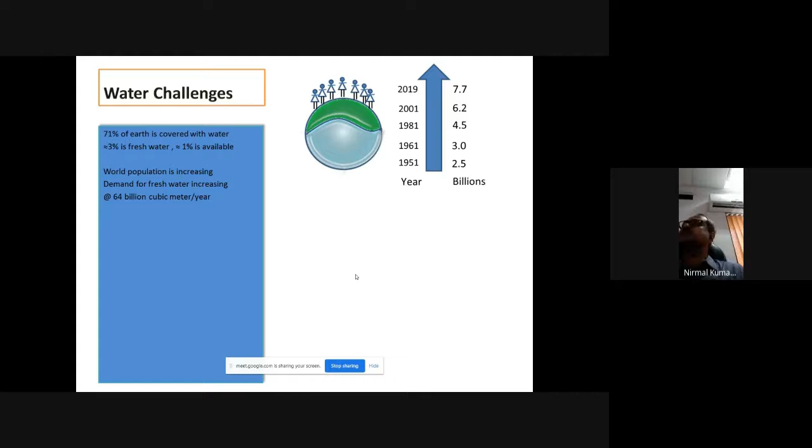And the way the population is increasing, you can see the statistics, 2.5 billion to 7.7 billion in 2019. So there is an increasing need for fresh water. There is 64 billion cubic meters per year; this is what the data was saying a few years back. So most of the countries are becoming water stressed, also India. We say a country is water stressed when they extract more than 80% of their groundwater.

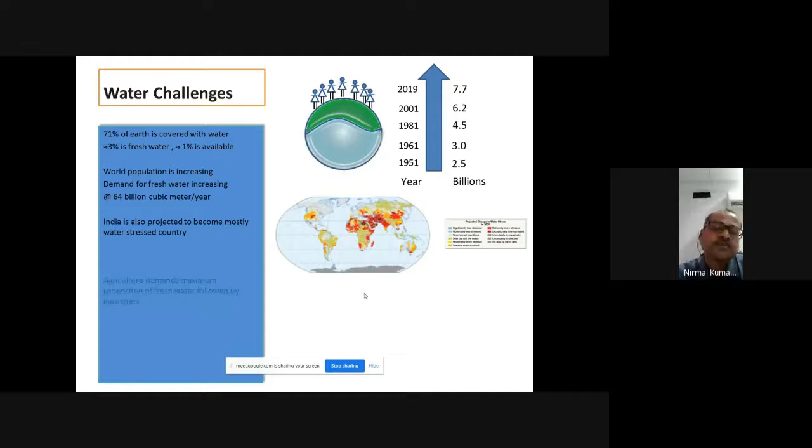So what is water consumption? When we are extracting water and utilizing it, and that water cannot be utilized further for any other purpose, then only that part is consumed. The rest of the part is in a way wastage. Either it is drained or it is producing wastewater.

So when the world is becoming increasingly water stressed, we really cannot afford to lose this water, particularly fresh water. Reclaim and reuse, all these things are fine. But the demand, you see, is 64 billion cubic meters per year, every year. So even after doing all these things, we probably will not be able to meet the water requirement of the world.

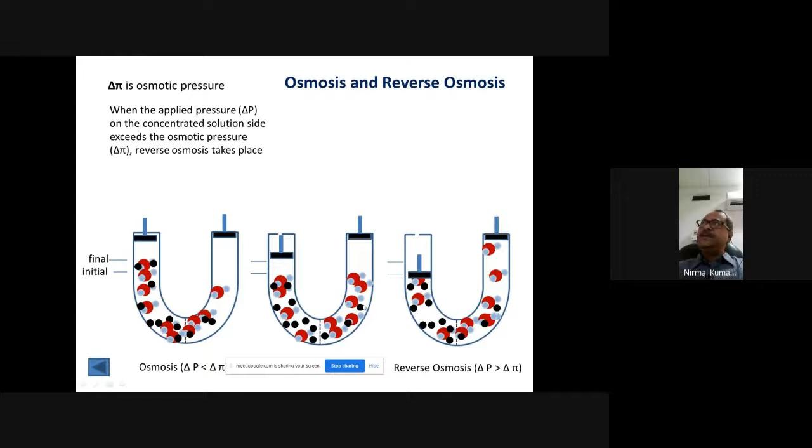So this thing was first demonstrated using a bladder, natural pig bladder probably. And thereafter, of course, everybody almost forgot this osmotic process. But a desalination unit was made available only in 1885 as a unit.

And the credit goes to, I think, a French person, but he was in Britain. One patent was granted in the same year, 1885. That was a vertical tube-like structure, and desalination was possible through that structure, I think 7,000 gallons per day. That was totally based on the thermal distillation process.

Before that, in ships, people used to boil water, collect the vapor, condense it and drink it. So in that way, desalination was done. But this was the first time in a very organized way, I will say. And during that period, of course, the steam engine came after the industrial revolution. So in ships, thermal desalination became popular.

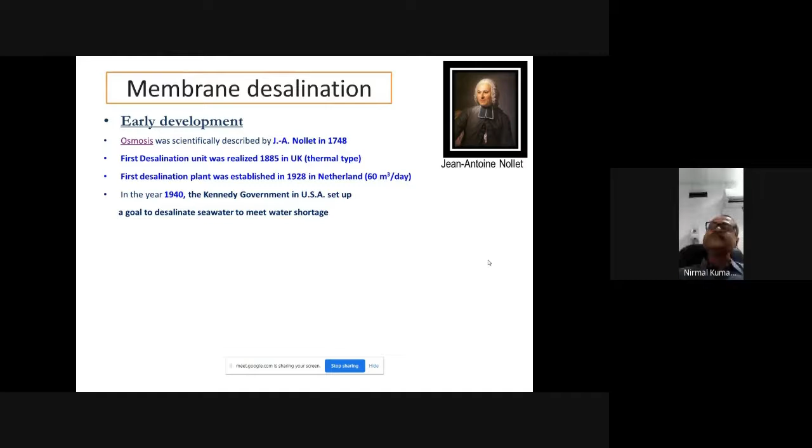One membrane, a polymeric membrane, which could desalinate water. So that was the first reverse osmosis membrane, and a process developed on the basis of the osmosis phenomenon. And just one important point I'd like to share. I couldn't find any information about this gentleman, Srinivasa Sourirajan.

He is still living. Sidney Loeb, of course, left in the year 2008. And Srinivasa Sourirajan must be about 98 now. He is in Canada. But we really don't have any information on the internet. The only thing is we can find his papers and a few patents. Everything is from the work of Loeb, or if we find something written about Loeb, then only we get something about Srinivasa Sourirajan. Otherwise, we really don't know anything. So if anybody can find any information and share it with me, I'll be very happy.

So that membrane was based on cellulose acetate polymer. They prepared a membrane which could desalinate. Now, that was a very interesting thing, and that attracted many other industries also. Though thermal desalination was there, people suddenly realized its importance because the energy requirement was much less compared to thermal desalination.

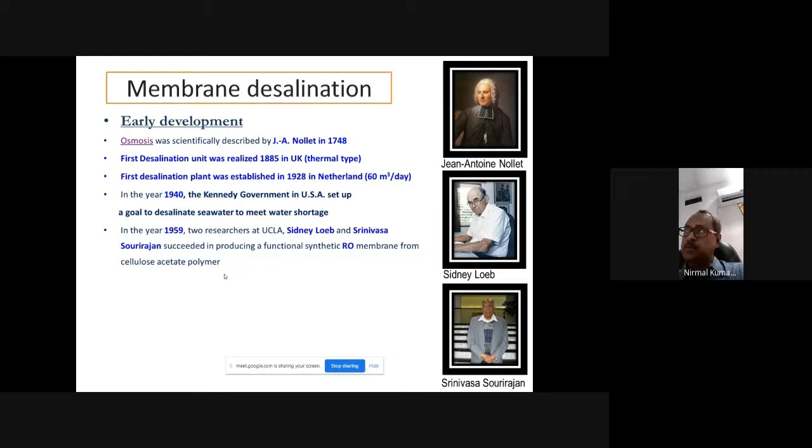And immediately in California, in the year 1965, they established a pilot plant. Only in 1959 this was discovered, and in 1965 the pilot plant was installed in California, producing 7,605,000 gallons. In 3 years it produced this much water, and salt rejection was, of course, not that good. Usually, seawater salt is around 33 to 42,000 ppm. So only 89% was the salt rejection, but still, that is very good.

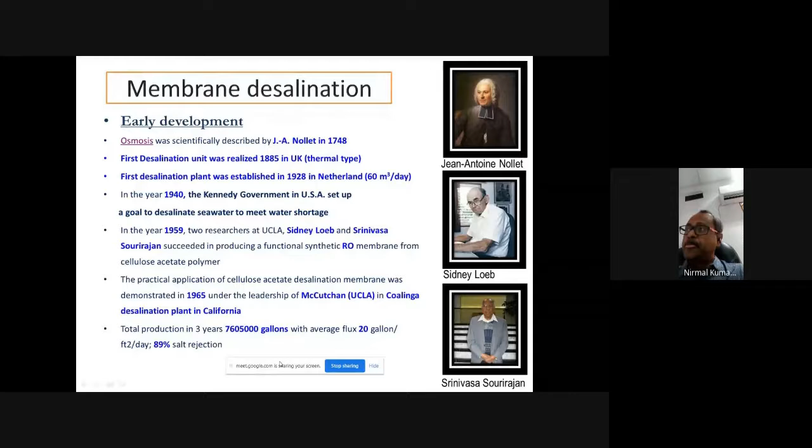So immediately, the government also showed their interest. A particular research institute was given this task, North Star Research and Development Institute in Minneapolis. And this gentleman, Peter S. Francis, I have shown. I could only find one photograph of this gentleman.

He was actually a chemist in a powder company, and his research interest was tablets, pharmaceutical tablets, coating of the tablets, all these things. So he was given the chance in this institute to further develop the membrane. And I have particularly chosen this photograph because he gave a very important concept, the composite membrane concept. What are composite membranes? In very short, I would like to say.

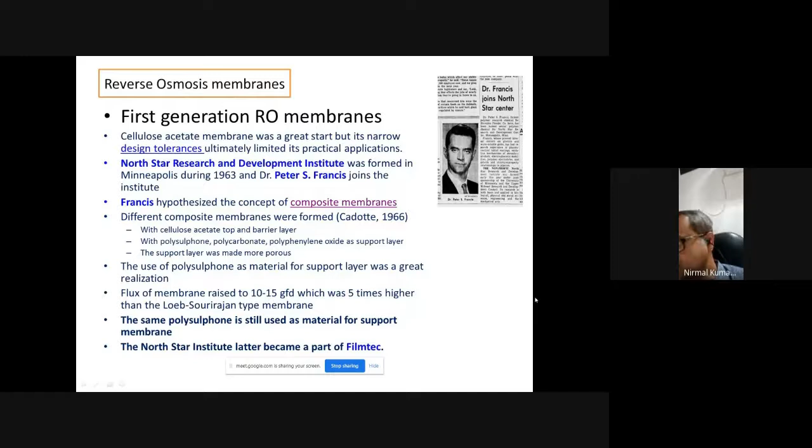So flux also improved a lot. The Sourirajan membrane was giving 3 GFD, and now it is giving 5 times that. And certainly the rejection also improved. We probably know about the FilmTec company, which is still dominating the membrane market today, FilmTec and DuPont, part of Dow. The North Star Institute, which developed this composite membrane, became part of FilmTec. So this is the contribution of Cadotte.

In a simple way, this gentleman, Morgan, conceptualized interfacial polymerization. Interfacial polymerization is nothing but taking two immiscible solvents. One monomer is taken in an organic solvent, the other in an aqueous solvent. Since they are immiscible, they meet at the interface, which is very fine, very thin. We choose monomers that are highly reactive to each other, but they cannot react directly because one is in organic media and the other in aqueous media, so only at the interface do they come in contact.

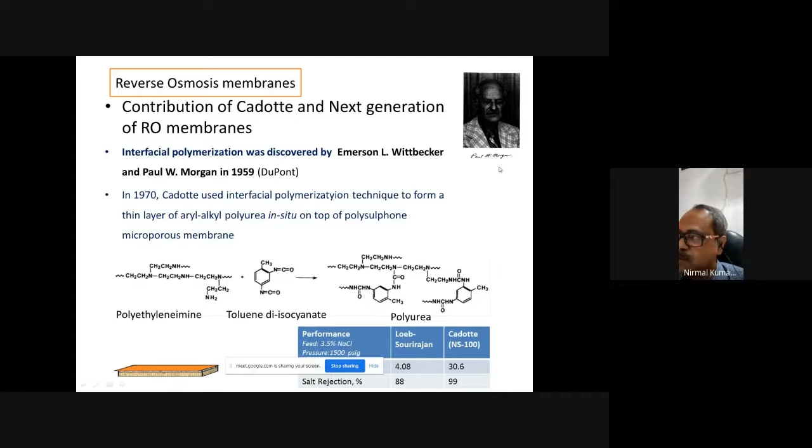So a fine film is formed, and that film is put on the support film, as I'm showing here. This is how we make the polysulfone membrane: one support, a fabric, on top of that the polysulfone membrane, and then this thin film made separately is placed on top. This is the composite membrane, and today also we are using the same kind of membrane and same chemistry. The phenomenon was discovered by Morgan, and Cadotte used it.

These are different commercialized membranes, PA300, RC100, developed during 1970 up to 1980. This piperazine based membrane, this is one monomer, and this is meta-phenylenediamine. These are still used and probably the only commercially very successful combination. All reverse osmosis membranes are a combination of meta-phenylenediamine and trimesoyl chloride forming the top layer. For nanofiltration membranes, people choose piperazine, not meta-phenylenediamine. Everything was discovered before 1980.

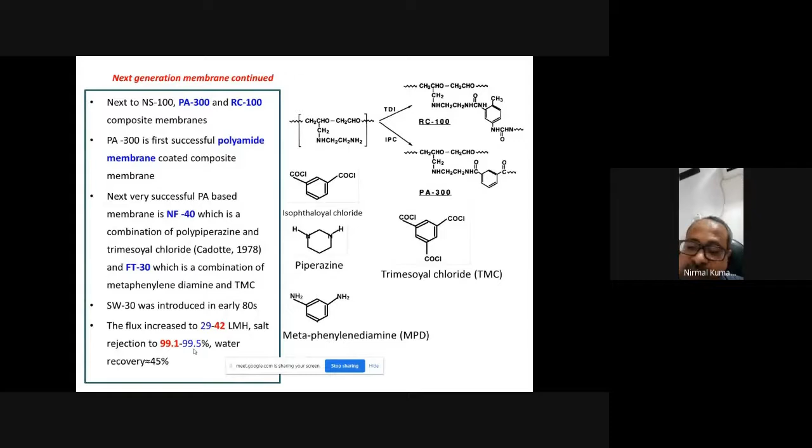So the flux also increased, 29 to 42 liters per meter square per hour, and salt rejection 99.1 to 99.5, now 99.7. In 1959 the reverse osmosis membrane was first made, and by 1978 or 80 almost all the work was done. There have been some modifications, but the base work remains the same. Rejection already reached 99.7%, so hardly any is left, and 100% rejection is not possible.

So this is the scenario of seawater desalination worldwide. Nowadays there are 19,000 plus desalination plants.

I didn't say these are all membrane based. They are desalination plants, so seawater is desalinated. This is the capacity of different, very big desalination plants. Most of them are in the Middle East. You can see these are almost all of them. And you see the capacity, 1,000 million liters per day.

It is a combination of RO and MSF. MSF is a thermal based technology, that is multi-stage flash distillation. And these, you will see, are also thermal based and RO. Actually, what happened? Saudi Arabia, United Arab Emirates, they were always water stressed countries. They didn't have a very good source of fresh water, so they were depending mostly on thermal, because at that time the reverse osmosis membrane hadn't come.

So before that, they started desalination that was thermal based. In addition to that, they have plenty of oil, fossil fuel, so they could bear the cost of energy. So most of the plants started with thermal desalination, but with time they have expanded those plants, and all the new installations, all the expansion work, are done based on the RO method. Now it is increasingly becoming favorable.

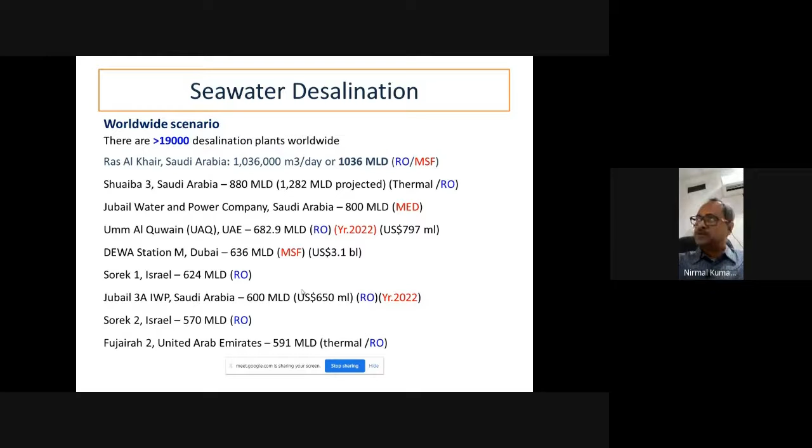So now 69% plants are actually RO plants, 18% are multi-stage flash distillation, and 7% of the plants in the world are multi-effect distillation. Multi-effect distillation is another thermal technology. The rest of the plants are like nanofiltration, electrodialysis. Those are some other desalination methods.

This table shows the distribution of these plants; these are mostly in the Middle East, East Asia and Pacific, North America. 47.5% of the desalination capacity, million cubic meters per day of water, is produced in the Middle East and North Africa. East Asia and Pacific, all these are less. You will see that these countries are very high income group countries. So desalination of water obviously will involve some cost.

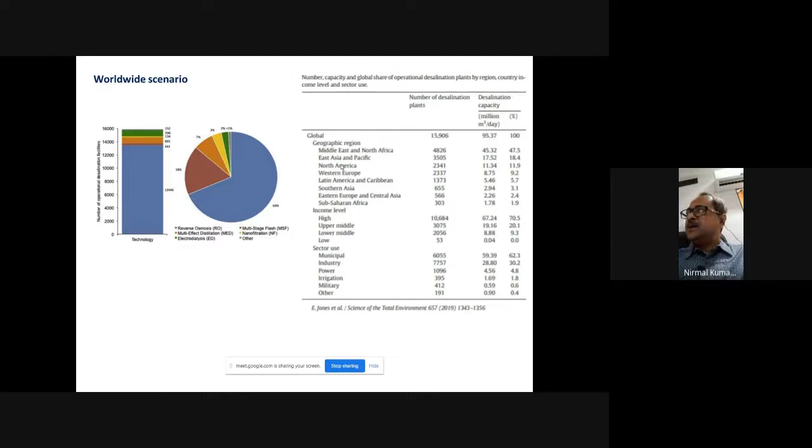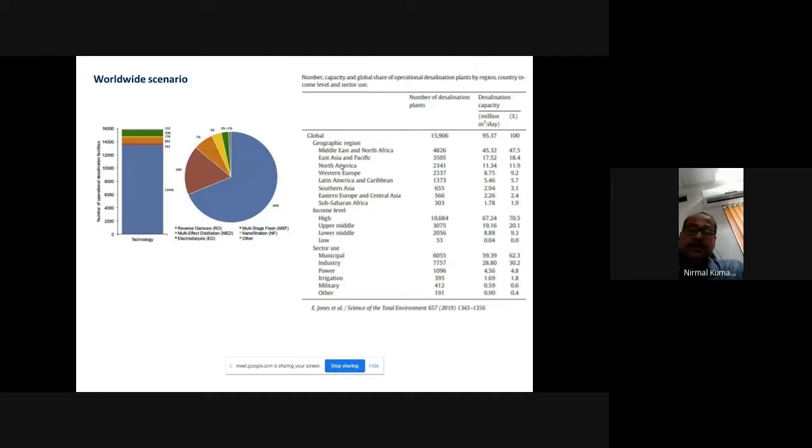And when cost is involved, the low income groups, even if they have some scarcity of water or are water stressed, they don't have fresh water, but still probably they cannot bear the cost of desalination. Nowadays the price is decreasing, but still it is not free water. So this is the worldwide situation. If you see the Gulf, they account for 61.4% of seawater desalination capacity. But for brackish water, it is North America, 36%.

And in India, there are only two plants supplying water to the Chennai municipality, but there are three other very big plants, and one of them is really big. Those are for private parties. So India accounts for only 2.2% of seawater desalination capacity, 4.4% for brackish water, and 2.3% for wastewater treatment.

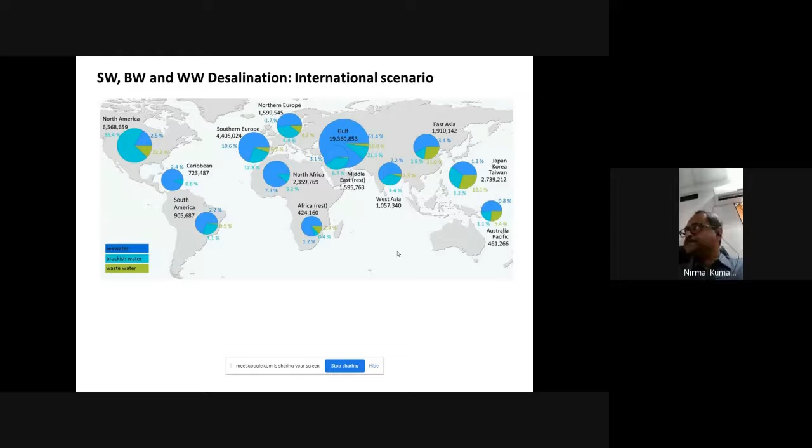So now the question comes, the cost. What contributes to the cost of desalination? Everything we have converted in terms of electrical energy. Now I need to explain a little about the MSF and MED processes. In multi-effect distillation they use steam, and the seawater is sprayed on the steam tunnel. The water becomes hot and a part gets vaporized, and that vapor is collected.

Now that vapor is again passed through a tube in cold water, and again it vaporizes the water. So in different steps, it vaporizes water, vapor gets condensed, and we collect. That is multi-effect distillation. Since steam is involved, it automatically involves thermal energy. Similarly in multi-stage flash distillation, they heat the brine, and then the brine enters different chambers with decreasing pressure.

So at atmospheric pressure water boils at 100 degrees centigrade, but when the pressure is less, water will automatically boil at a lower temperature. So in that way they increasingly decrease the temperature, and when the water enters a chamber where the pressure is maintained lower, whatever temperature the brine is carrying remains above the boiling point. So automatically, to attain equilibrium, it flashes out the vapors. That vapor they collect in different stages. So ultimately it involves thermal energy.

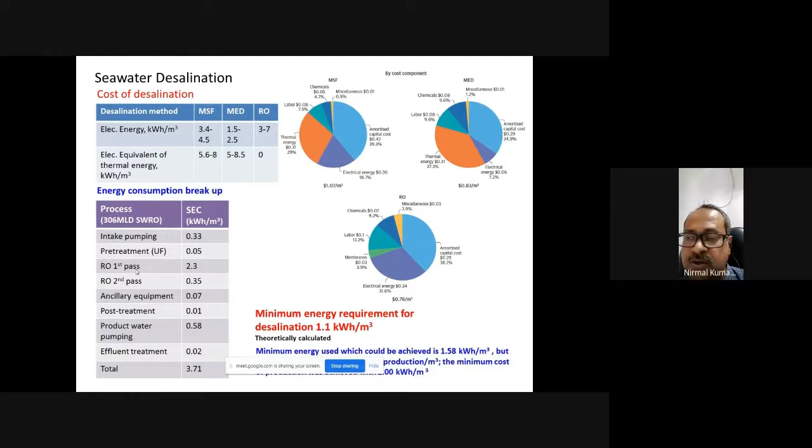Now, what are the cost components? In the RO system, the first pass consumes maximum energy. The first pass means the raw seawater, after all pre-treatment, is first filtered through a membrane, and maximum energy is required there. In subsequent passes, if required, the water may be refiltered, but there the initial feed concentration is maybe around 1,000 or 2,000 depending on plant design. So initially 42,000 to 2,000, and later from 2,000 to below 500, maybe 300 or 200, and in some countries they add minerals to it. Those steps are not really energy intensive. Only the first RO filtration step is energy intensive.

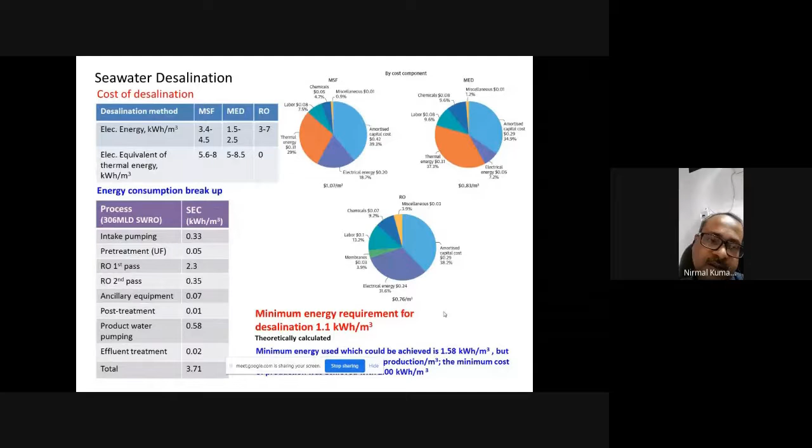Now, what is the minimum energy required to desalinate seawater using an RO membrane? It depends on the osmotic pressure. We have to apply pressure above the osmotic pressure, then only desalination will take place. Thermodynamically, it has been calculated that for seawater desalination we need 1.1 kilowatt hour per cubic meter. But in the real system the minimum recorded is 2 kilowatt hour per cubic meter. The energy required to achieve desalination in the real case is 1.5, but at plant level it is 2.

Still, I'm showing in this table that 3 to 7 kilowatt hour per cubic meter of energy is required for desalination, because other systems like intake pumps, pre-treatment, auxiliary equipment, post-treatment, and product water pumping consume 0.58 kilowatt hour of energy per cubic meter. Those are adding cost.

So if we want to reduce the cost of desalination, certainly we'll have to go for better membrane materials. But that will hardly reduce it, suppose from 2.3 down to around 2, or maybe 1.8 at maximum. That's why other things like pre-treatment, intake, pump efficiency, post-treatment, and water distribution are becoming increasingly important. People are working on those areas, other than membrane material, to reduce the cost of the desalination process.

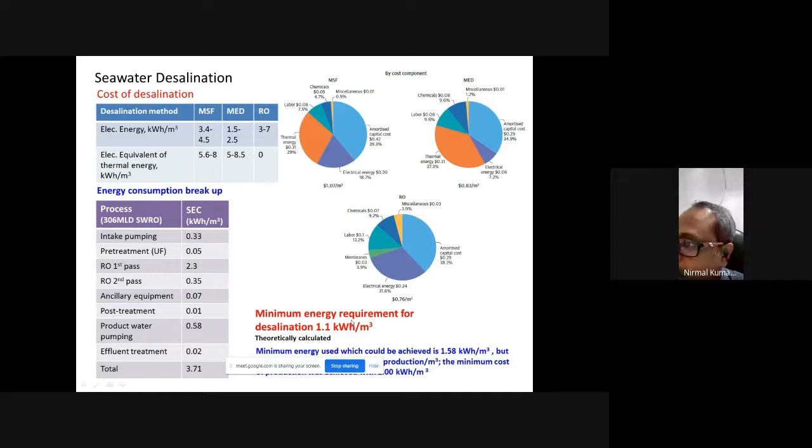Now, Spain is also water stressed, and they don't have much fresh water. So since 1970, the price decreased and the energy consumption decreased. This is a Spanish experience. In one of the papers they have published, it was 22 kilowatt hours per cubic meter in 1970, and in 2009 it is less than 3 kilowatt hours.

So these are the different factors that really improved, like the membrane performance and availability and choices. Now we have different types of membrane. If you want a high rejection membrane, yes, it is possible. If you want relatively low rejection but more productivity, yes, it is also possible. If fouling should not occur, yes, there are low fouling membranes.

So there are these different kinds, and even ultra low energy, where you need very little pressure. So compared to 900 psi, now people can even operate at 800 psi or less than that. But different types of membranes are possible, and they're active.

Then one more thing is the plant design. So there is a lot of improvement in engineering designs. These are different types of plant designs. A simple way I have mentioned is a single pass system, where the feed will enter and you will get the permeate and the reject will be rejected. But in two stages, the reject can again be treated to get the permeate. So in that way, you are increasing the water recovery, which is also very important.

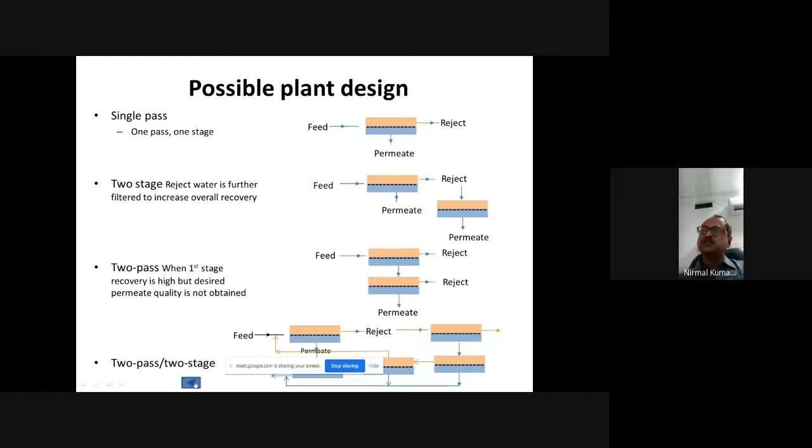Brackish water has TDS around 500 to maybe 15,000 for very high brackish water, but usually in the range 2,000 to 7,000 for drinking water use. So there we can still attain 70 to almost 90% recovery. So water wastage is also less in that case. So these different kinds of design have reduced the cost of desalination.

Pre-treatment is another very important factor, because a thin film composite reverse osmosis membrane is made to filter out the salt from water, not the other things. There should not be any coarse particles or macromolecules, because they will simply block the pores. They will simply block the membrane. So membrane productivity will go down.

Once the membrane productivity is reduced, we need to clean the membrane. So I need more chemicals. Then chemicals will again add to the cost. Then after washing repeatedly with chemicals, the membrane itself will lose its integrity. So a time will come when we need to replace the membrane, and the replacement cost is very high. So pre-treatment is very important.

So before going inside the membrane modules, the water should be treated properly. It should be free from bacteria. It should be free from all macromolecules or any suspended particles, and scale formers like calcium. So during the pre-treatment, all these things are taken care of. So with the development of the pre-treatment process, the cost has reduced again.

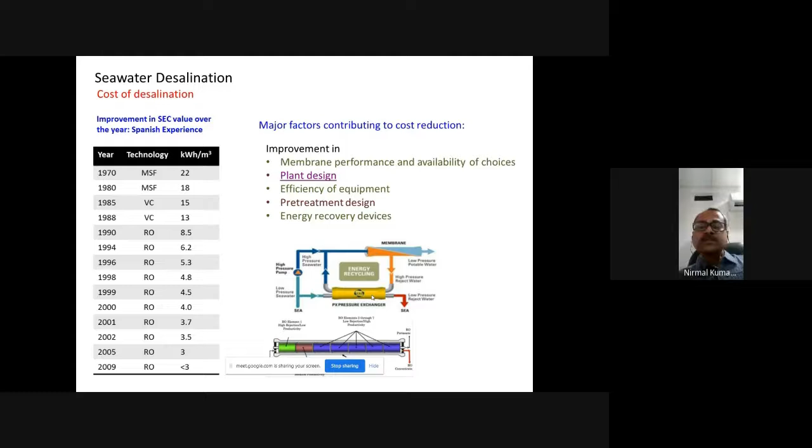So if we can make use of that energy, the exchanger uses that energy and transfers the pressure from the reject water to the feed water again. So you don't need to pressurize the feed water up to 800 or 900. You can pressurize the feed water up to around 600, and the rest, 100 to 200 psi pressure, can be reclaimed from the reject water.

So in that way, that is reducing the energy cost. Actually, 60% of the energy cost is reduced by the use of the pressure exchanger. So that is a very important thing.

Module design and how they are placed, just as an example. Earlier they used to place only one module inside the pressure vessel. Now they are putting several modules. There are many advantages of placing several modules like this.

I'm not going into the details, but at least we can see that at the inlet we need closers or couplers only at both ends. In between, we don't need them. So that is reducing the cost. Because with 7, in a single arrangement, a single module in a single case, we need 14 couplers, but here we are only working with 2 couplers. So that is also reducing the cost of the process.

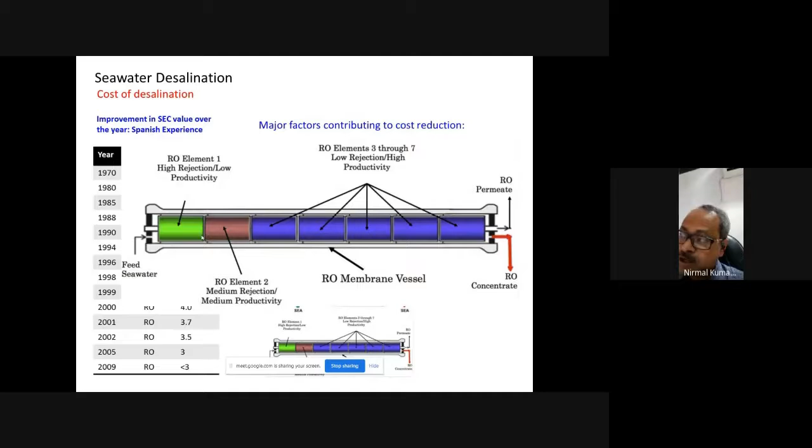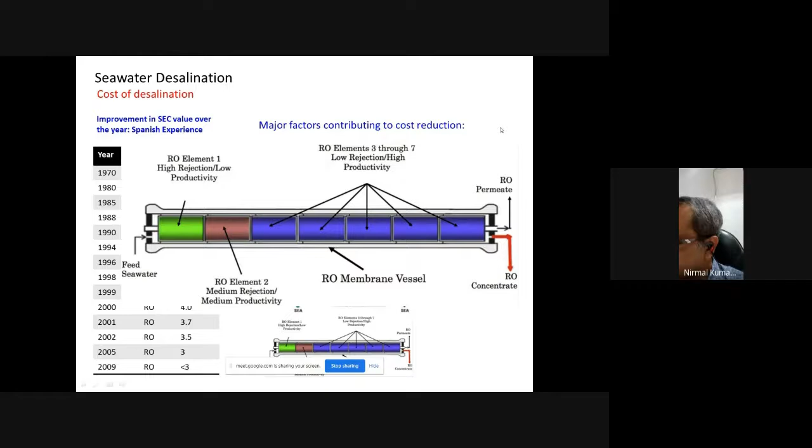And also, suppose our target is 1000 liters per hour; with a minimum volume of feed water, if I am recovering more water, I will gain profit. Otherwise, I will have to continue the process for a longer time to achieve my goal. So water recovery is increased in a different way. This is another combination: combining modules, then placing the pressure vessels, then maximally utilizing the energy. In that way, the energy requirement for the desalination process is also reduced.

Now, this is the cost of desalinated water in different places, like Algeria, Australia, China, Cyprus, India, Israel, Saudi Arabia, Singapore. You can see the cost. It is mostly around 0.7, 0.6, depending on the geography and location. In Australia, it is coming around 1.17. Then in India, it is coming around, I think, 1.03. Yeah, $1.03 per cubic meter, that is 1,000 liters.

But these plants, like this plant, are costing only 0.49, 0.36. These are actually very big plants. Those big plants actually operate at a much cheaper cost in different ways. It is all engineering things, actually.

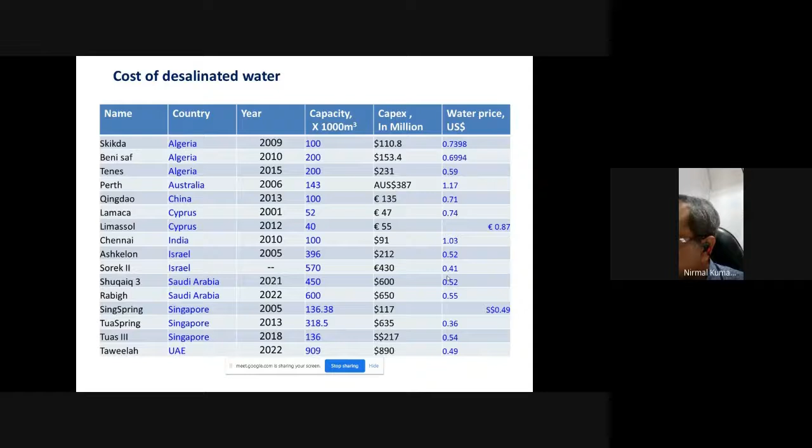Seawater pre-treatment: I would like to give some importance to pre-treatment, because pre-treatment itself accounts for 12% of energy consumption, and it's very important, because if we don't treat our water properly at the pre-treatment level, it will reduce the productivity of the plant, and as I said, it may damage the membrane, and then we may need to replace the membrane.

SWRO, seawater RO, membrane replacement cost is 6% of the total plant cost. One membrane usually lasts for 3 years, and if proper care is taken, 4-5 years maximum. So this pre-treatment is very important, and I'm discussing the pre-treatment part a little bit. This is one typical pre-treatment chain I have shown.

This is the raw seawater intake point. Then screening is done, and all the suspended solids and other things are removed. Then it's pumped, then there is dissolved air flotation. Due to the oxidation and air flotation, flocs are automatically formed on the top, and those are removed. Then it enters the pump, then again straining, and then membrane filtration.

I'm showing all these things because when I did my MTech in energy technology, I had no idea that I would be working in this field, but I had the opportunity. And later I realized, okay, this is a nice one. Many students may find it interesting, so I'm showing these things. Not only chemists; engineers are also very interested.

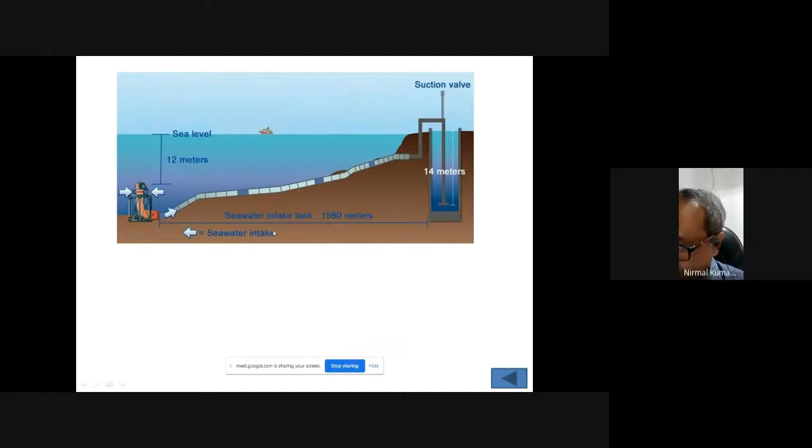I'm showing another figure here. What happens when an algal bloom takes place? You see, the whole surface water is covered by algae. If it enters the system, it will choke the whole process. To avoid that, these deep sea pumps are more useful. If you take water from the deep sea, you can avoid all these things. These are all small things that contributed to reducing the cost of operation in the process.

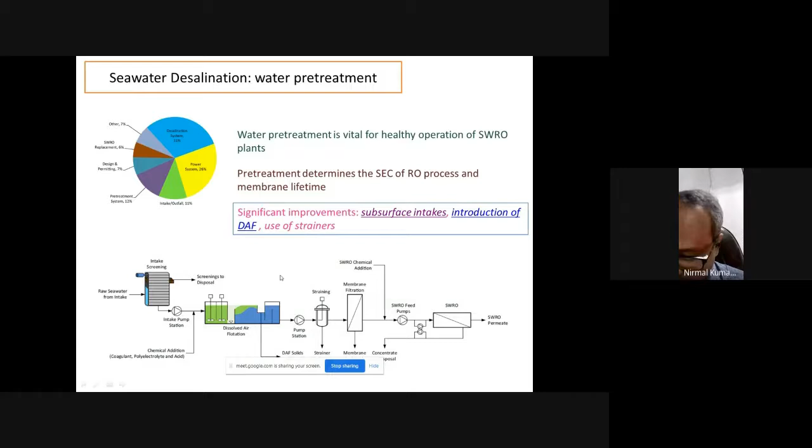See, yes, reverse osmosis desalination consumes less energy, but still, whatever energy it is consuming, it finally depends on fossil energy so far. But if we can use renewable energy sources, then it should become even cheaper. But nowadays, it is not cheaper. There are many plants, still a good number of plants.

Out of 87 indirect solar desalination units installed worldwide, 52% are RO based. But the main cost is presently contributed by the additional capex and opex. They are the major cost contributor. Additional capex and opex is for, suppose if it is PV based or wind power based, then we need to install those things. So that will add to the cost.

Otherwise, with time, it has been calculated that maybe in the year 2030, it will become parallel to fossil fuel driven, not thermal, but RO processes. It will come around $0.85 to $2.43 by that time. But right now, this is not possible. Renewable energy driven plants are not really competitive. But with time, they will certainly become competitive.

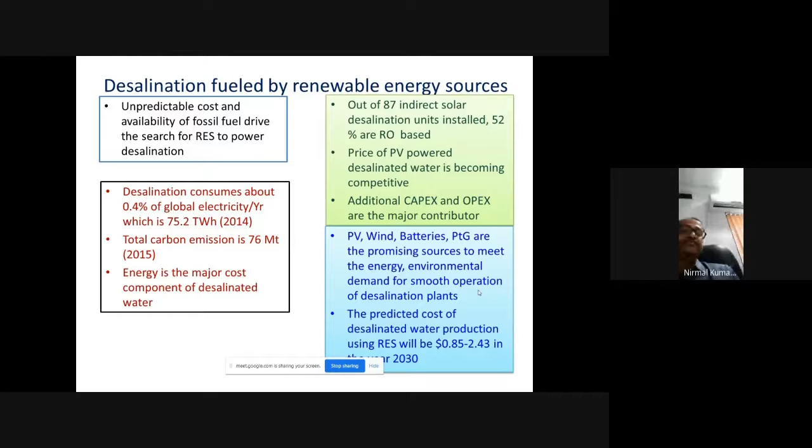Just to mention here, we have also installed one RO plant, which is solar energy based, in Rajasthan. It is operational. Now, brine management. Now, there is another problem.

People often say that RO-based desalination technologies are highly polluting in nature. What will happen to the reject? See, the seawater is 42,000, let us consider. Automatically, the reject will become nearly 70,000 ppm. So this is a very high salt concentration. So nowadays, the common practice is they are throwing it to the sea.

So automatically the environmentalists are now questioning. You are throwing it back to the sea, and it is creating some problem at the local ecology level, it's destroying the local ecology. But I don't know this fact, because people are still working on that.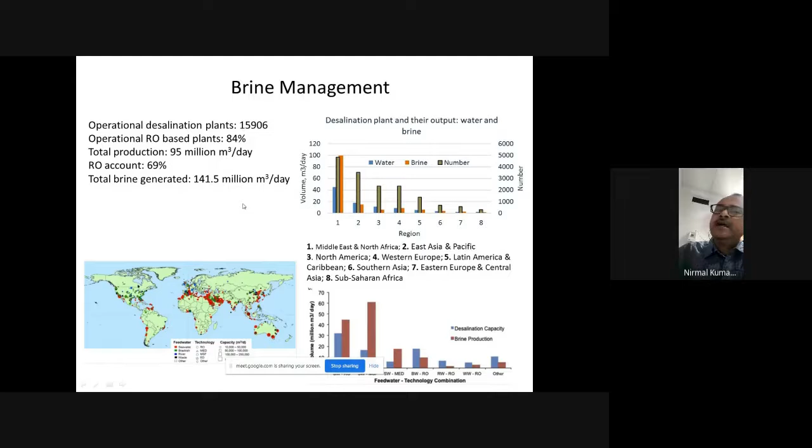So what I will say is that the brine volume generated is significantly very high, 141.5 million cubic meters per day. So it's a huge volume of brine which is going back to the sea. And so that may create some problem, but I'm giving you some examples. So these are some of the things I have shown.

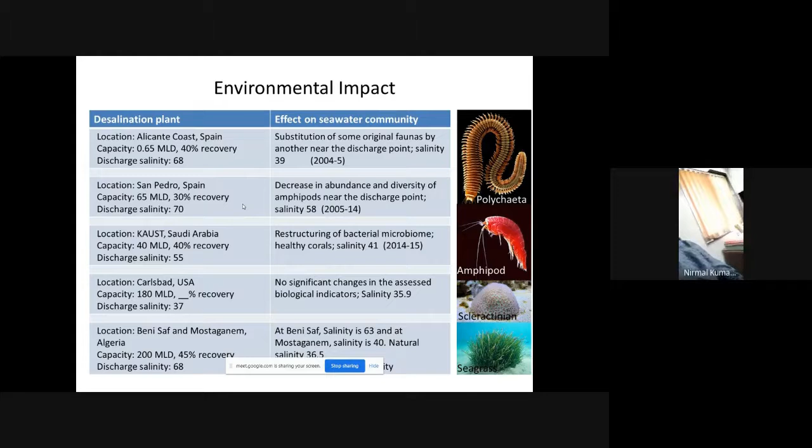They have observed that some species disappeared when there was excess concentration at the local level. But with the introduction of another technology called diffusers, those came back. The lost ecology could re-establish. What is the role of a diffuser? The diffuser, at the point where the reject water, the concentrated water, is released, spreads it around so that the concentration immediately gets distributed in the whole sea, or at least the near vicinity.

So they are restricting the effect to a maximum of 200 to 1500 meters. When they use a single diffuser, the concentration gradient remains up to 1500 meters. But when they use double diffusers, they have observed that in most cases the concentration gradient remains limited within 200 meters. So only the ecology of the 200 meter radius area will be disturbed,

not beyond that. And nowadays they are even mixing the reject water with water collected from the thermal power plant, because most desalination plants are also connected to thermal power plants. So they are mixing it with the coolant water and diluting it. And sometimes, this particular figure I have shown.

So there, Carlsbad, what they do is mix the reject water with the seawater at the outlet point itself, and the mixing takes place in such a way that the surface water salinity remains below 34 ppm within 50 to 200 meters, not more than that.

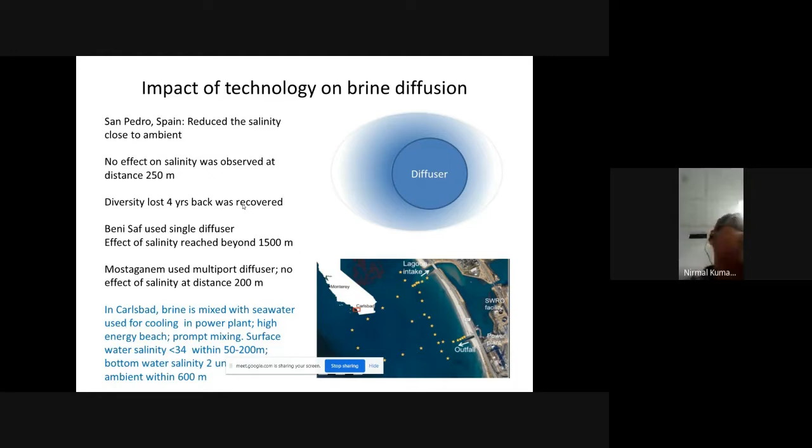So there are different techniques which are reducing or minimizing the effect of this reject water. But still, people are studying now if there is any more effect or not. So there are different technologies which are coming forward to treat this reject water. The most promising one is vacuum membrane distillation.

So the reject water is again distilled, and when vacuum is applied, at very low temperature this forms vapors, and the vapor passes through the membrane and is collected on the other side where it is condensed. So not only are you managing the reject water in a better way, we are also collecting more water, so that will also increase the recovery of the plant.

But all these technologies are mostly at the pilot scale level or at the R&D level. Only vacuum membrane distillation is at the pilot scale. There is no commercial plant based on this technology.

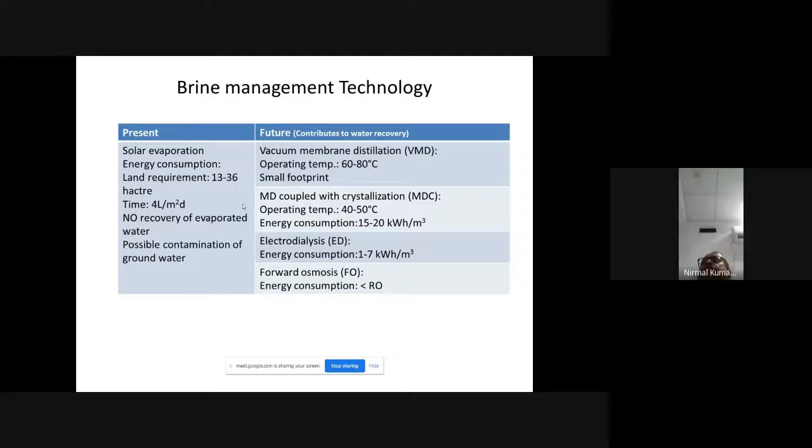So now the national scenario: 82% of the rural households in India do not have individual piped water supply. And 163 million live without access to clean water close to their homes. Now, India is also a water stressed country because we are extracting more than 80% of the groundwater.

There are only 2 plants which are working for the people. That is the Nemmeli plant and the Minjur plant in Chennai. And those two plants can only meet 25% of the Chennai water requirement. Each plant supplies 100 million liters, but with time, more governments are coming forward, like Andhra Pradesh, Maharashtra, and Gujarat. They are considering this option of seawater desalination more seriously.

In Gujarat, I attended 2 meetings. Then we observed that finally, when the tendering process is also completed, Gujarat is of course not going for any very big plant. They are going for small plants, but multiple numbers of plants at the different coastal regions, just to avoid the pumping cost.

Because in Gujarat this pumping system is there. Narmada water they pump throughout Gujarat, but the thing is the cost is becoming very high. So they are now considering small, locality based plants. But in India, there are 2 or 3 other plants. Like one plant is here in Bhavnagar itself.

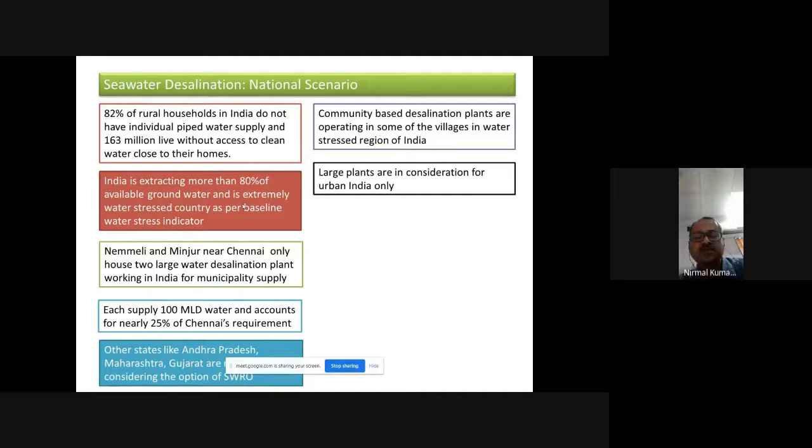So my concluding remarks will be that seawater certainly is an option which can supplement the water through the desalination process. The thing is, the desalination process, whether it is thermal based or membrane based, will consume energy, and for countries like ours and many other undeveloped or developing countries, probably we cannot really directly afford this cost.

The thing is, we'll have to save water and we'll have to recycle water. We'll have to work in that direction also. If we use renewable energy sources, renewable energy is also not equally distributed everywhere. So that constraint will remain probably, like with fossil energy. So ultimately, water desalination is fine, but we'll have to work more to save water and recycle water, and minimize water utilization.